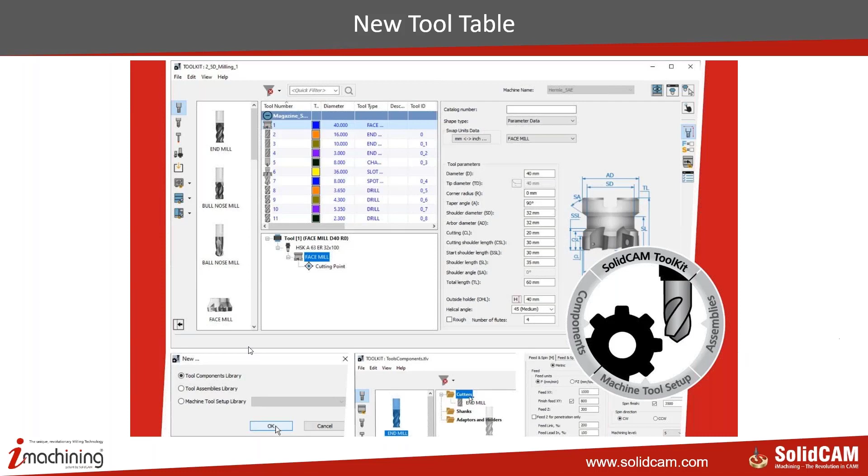For example, the classic tool table that we had in 2020 used to look something like this. And now we have the new tool table, which is a unified tool library system that facilitates better tool management, and it provides major enhancements in the tool definition functionality.

You can manage the tool items available for use for specific CAM parts and in accordance with the CNC machine chosen. So now what you can do basically is create a tool table or tool library specific to a CNC machine. And when you call that CNC machine into your part definition, the tool library also gets loaded along with it.

This is so important for Swiss-type customers who have their tools set according to tool numbers, and that doesn't change. Generally, once they set the tools, they don't change. So they would like to have the same tool type in the same tool number. So you can actually set the entire tool library specific to the CNC machine, and whenever you call the CNC machine, you also get those tools along with the tool numbers that were set while you were defining them.

So what I'm going to do now is quickly run into the software because it's a pretty interesting thing that we have in the new tool table.

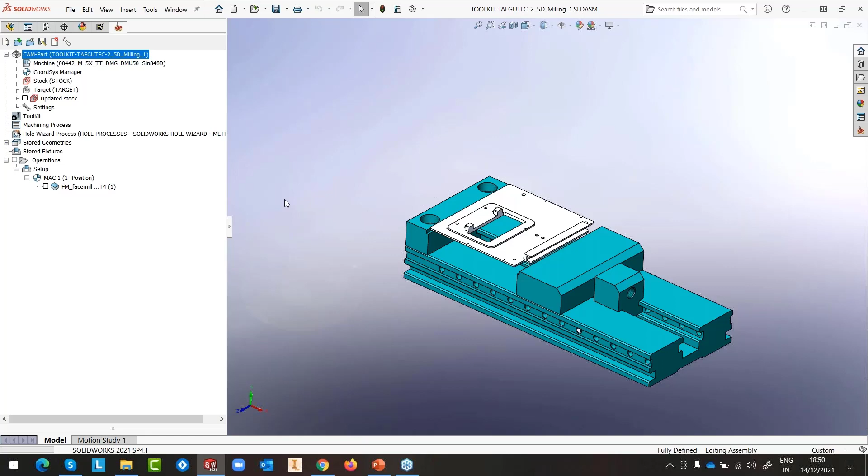So instead of tool table or tool library, we have something called toolkit. We've called this toolkit because it provides a kit to create assemblies of your tools and holders and multi-components. Basically, you can assemble the entire right angle head as a tool and call that tool in your library. So that's the reason why we have called it toolkit. So this is how my new tool table looks.

So if I want to add a new tool, for example an end mill, I can just double click the end mill here, or I can just drag it and drop it in my library here. And this is how my tool comes up. So I have got the tool component here, where I have got the topology. So I enter the dimensions that are needed.

10 diameter, cutting length, let's say it's 25, shoulder is 35, total length is 80, out of holder is 40, number of flutes 4. Now I can add on top of this, depending on what machine I'm using. For example, let's say I'm using a DMG 65 monoblock.

In such cases, I can go into the adapter or the holder and call for an HSK63 adapter. So I can just take the HSK63 and drop it into the holder area. So you can see that now we have an HSK63 holder, and I can put on the side how the tool is looking. I can get a preview straight away.

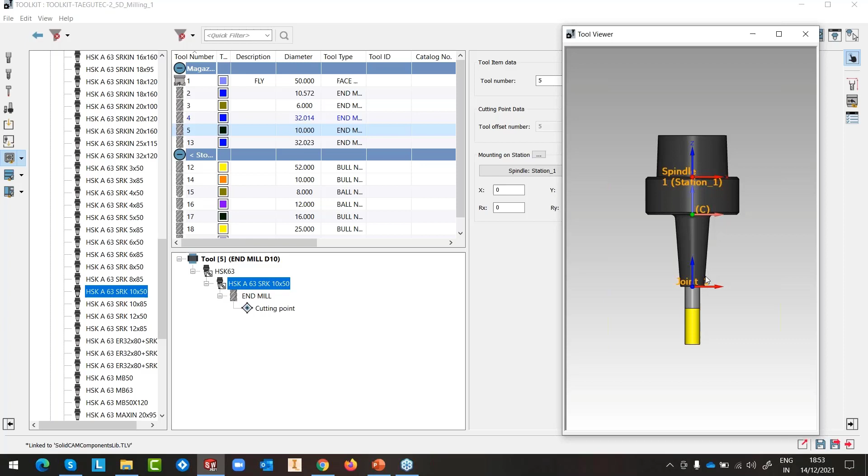So in a similar way, I can define any type of tool, whether it's a bull nose, ball nose, or a flat end mill, or a face mill cutter, or even in turning, I can define whether it's external turning, internal turning, grooving, threading. So you can define all these cutters as they are as an assembly. So each of them have got their joints.

So we have got a joint coordinate system. You can see that my end mill is connected to the adapter here. The adapter is connected to the holder here. And this is my spindle coordinate system. So this is where my spindle is going to rest. So this is how we create assemblies inside SolidCAM's toolkit.

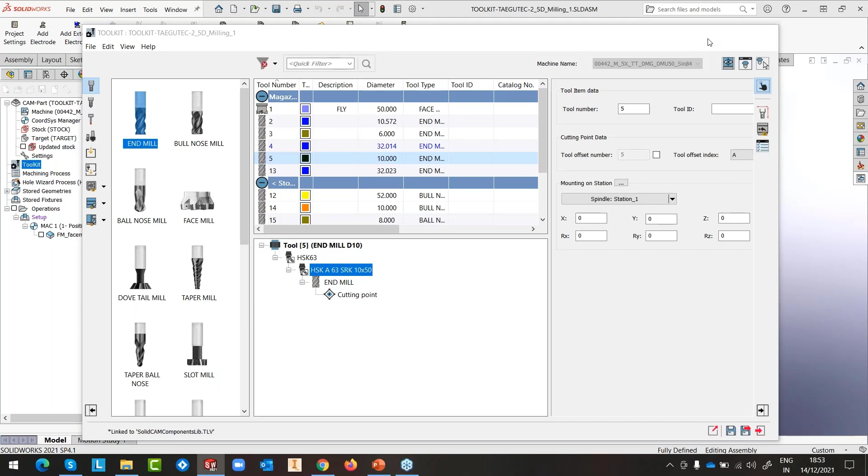Now let's do a very interesting operation. Let's say I have got my tool and I work with ISCAR. So what I will do is I'll open my browser and I open the ISCAR catalog library, what they call a catalog library. And I would like to get from ISCAR a face milling tool. So I'll click on milling.

And when I click on milling, I get the features or type of operations that you can perform with their tools. So I would like to do the facing operation. And then once I click on facing, ISCAR tells me which are all the possible options that you can use for working with their cutters. So I'm going to pick this cutter, HM90.

And with an HM90, it gives me three options here. So depending on which diameter I would like to use, I can select the option. I would like to use a 32 diameter face mill. So I'm going to select the 32 diameter face mill. So I'm now in my tool, and you can see that here, ISCAR gives me a possibility to have a detailed view of the tool. So I have got the tool, but without the insert.

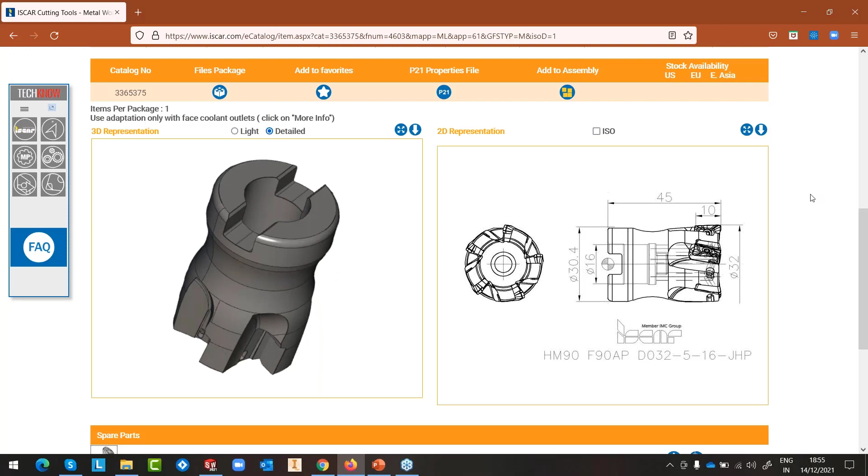So if this is my final tool that I'm going to use, I'll click on Add to Assembly. Perfect. So when I click on Add to Assembly, you can see that it has got the tool. Now there are two items that are still missing. Now this is very smart. So I'll click on Add Holder because the holder is still missing. And again, it shows me only those holders that are suitable for this particular tool. So I will use the BT type holder here.

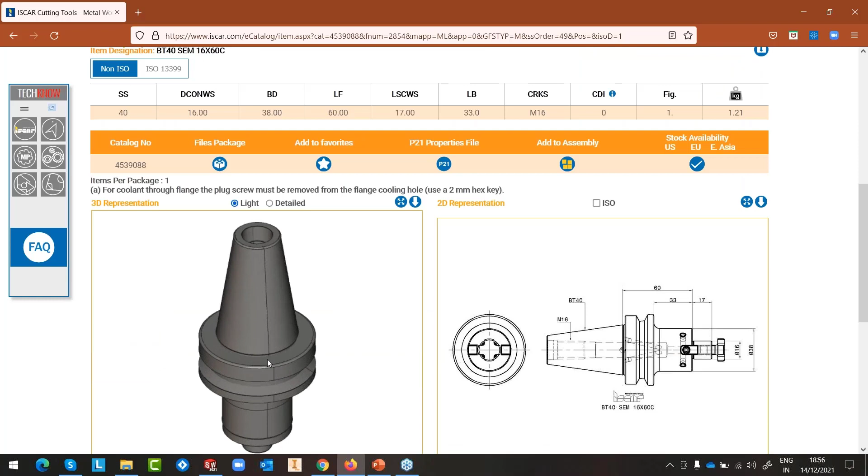So I'm going to select the first one, BT 40 SEM 16 by 60. And I'll add this to the assembly. This is the holder that I'm going to look for. I'm going to the detailed view. Detailed view sometimes can take some time to load up, because if it has more features, it'll take some time to show up on the screen. So I'll add this to the assembly. My assembly is now updated. I'm getting the holder as well as the tool body.

What remains now is the insert. So I'll click on the insert. And again, ISCAR shows me all the possible inserts for the tool body that I've just selected. So I'm going to use, let's say, APKT 1003 PDR-HM. This is the general purpose insert. So I'm going to select this insert. And there's only one possibility.

Of course, there are grades here. Basically, if I click on the grades, I'll only get the VC and the cutting speed. Otherwise, the geometry, I just click on this. So I've got several of them. I'm just going to pick the first one, and I'll add this to the assembly.

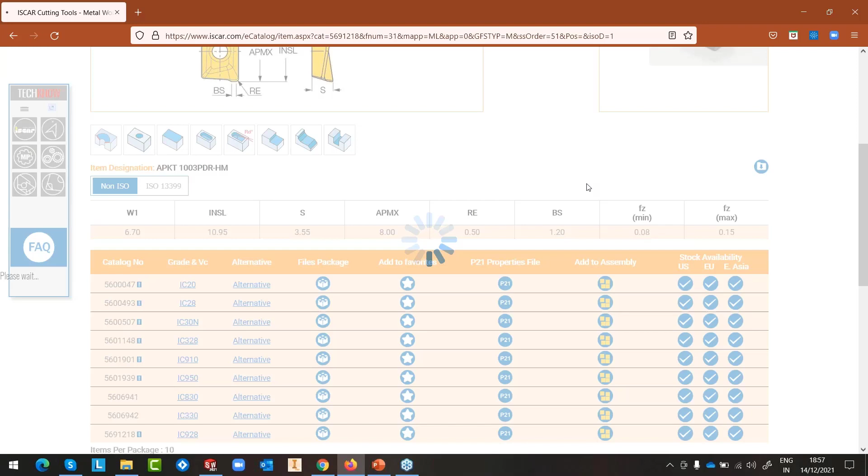Right, so my assembly is done. Of course, like I said, for the detailed image to appear, it will take some time because it needs to load everything. I'm not going to wait for it. I'm simply going to click this button and download the assembly, which is basically going to give me the... depending on the speed, depending on the components that are there in the part. So again, here I'm going to save it.

So like I said, it takes some time for it to show the detailed view. So I've done that. I'm going to open the part, cut this part, and go here, go into the ISCAR tools, and I'm going to make a new folder here. I'll say new webinar. Okay, and here I'll make another subfolder. I'll say milling, and I'll just paste this here and just rename this fellow. Say face mill 32 diameter.

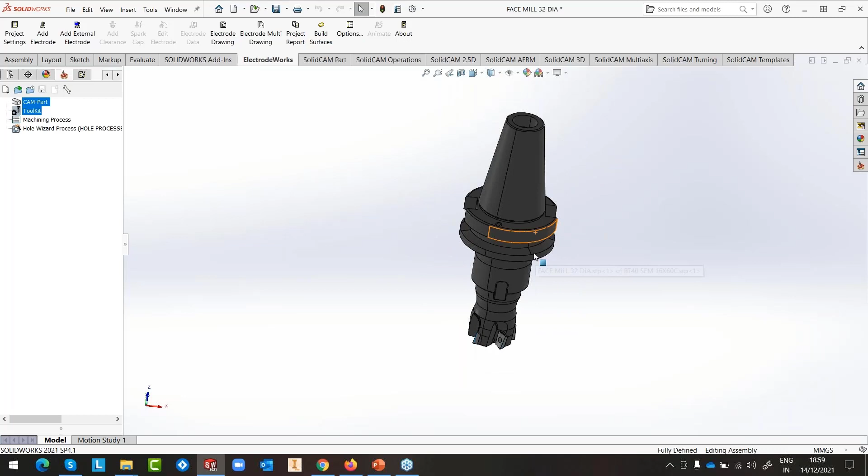So it's a step file that I've got. It's more than enough. I'll just close this for a moment, and I'll import the step file that I just got from ISCAR. Remember that these steps are common. It doesn't matter which particular tool manufacturer you're using. Once you get this particular file, all the rest of the steps are common to us.

So I'm going to start again, or rather open the CAM part. I'll open the toolkit. Okay. So I'll add an endmill here and minimize the toolkit. Go to my window and I'll open my face mill, or the face mill tool basically, and I'll click here on import tool assembly from CAD. Now, before I do that, I have to do a couple of steps, okay? And this step basically is needed because of orientation difference.

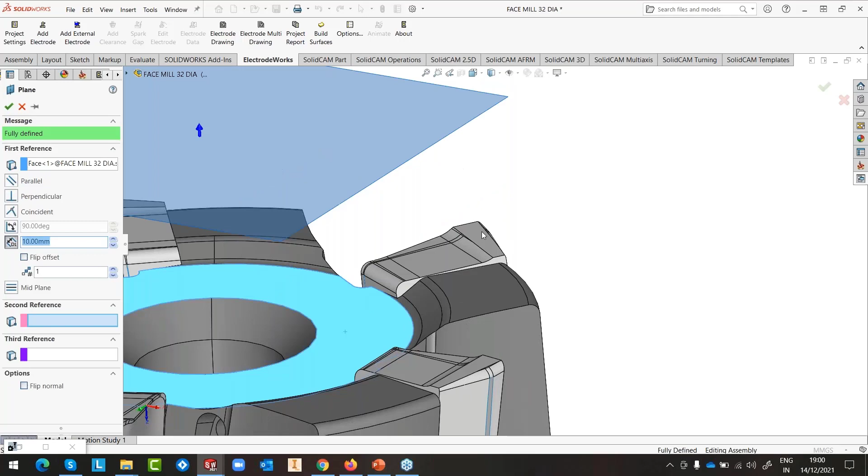So what I'm going to do here is let's create a plane at this point, somewhere here. Oh, sorry, not the edge. Okay, so I'll just create a sketch here. This is just for me to create a coordinate system. Oh, this is horizontal. Oh, vertical, sorry. Okay, another line on this side just for me to put the y-axis. Okay, this is done. So I'll create a reference geometry.

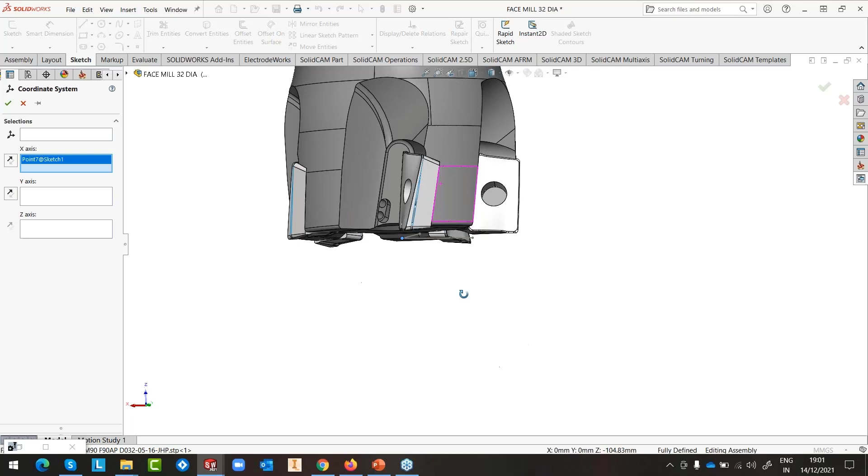I'll say this is my coordinate system. Delete. This is my origin. Sorry. Okay, and this is my x-axis. And this is my y. Okay, so z-axis is in that way. I'll accept this. I'll save this file. Let's not put it here. I would like to put it back into the ISCAR tools, new webinar, milling. Save it. Okay, so this is done.

I'm now going to open my toolkit, and I'll click on import tool assembly from CAD. I'll say okay, because this is my active window. So it's now asking me, what do you want this tool to be? There's a question that the UCS should be in the model. Actually, Doran, I checked it before. The UCS is in a different plane, so I don't get it exactly the way I want it. So I have to create a new UCS. So I'm going to generate this as a milling tool. So there you have it. It creates this tool inside SolidCAM as a milling tool.

However, you can see that I have a problem with my UCS, so I'm going to mount this UCS to the coordinate system number 1. Okay, I'll say okay. So I have the model, I have the tool here back in my toolkit. Just take, drag, and drop it here. This particular small change in our diameter, instead of 32, it's showing 32.014. It's basically because of the STL tolerances. This you can easily change here to 32. And if I click on the preview of the tool, this is how my tool is going to look. Fine. So my tool is done.

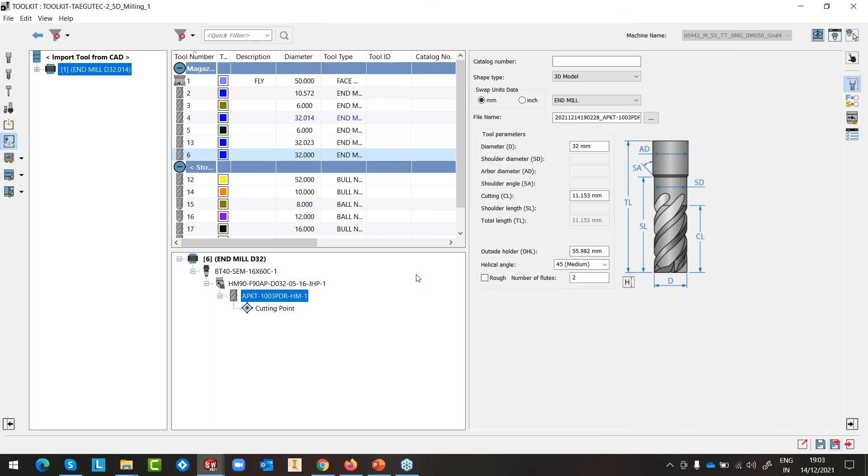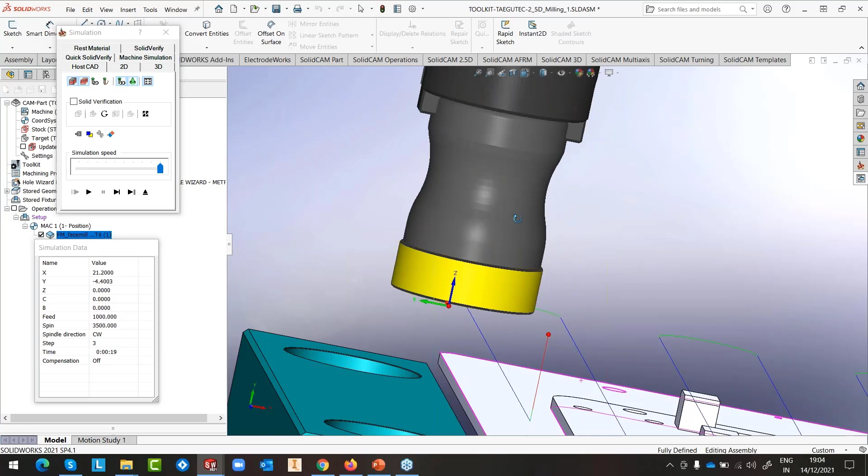This is tool number 6. Save and exit. And I'll go again to my machining file. I'll edit this toolpath, and I'll pick tool number 6 that I just created. Now if I click show, it shows me the tool. Accept this tool and hit the calculate button. I've got the tool and the toolpath. If I run the solid verification here, you can see what it has done now. It has revolved the tool to show you how it would look when it is running on a milling machine. But the shape, everything is the same.

So we take the tool, we take the profile and revolve it, and it shows exactly how the machining will happen with that particular tool. Very, very important, because sometimes when you do a definition of the tool using simple parameters, you could end up missing certain features on the tool, which when revolved could generate collisions with your part.

In such cases, you should have the tool exactly the way the manufacturer has manufactured the tool, and use this for simulation. So I can take it also into SolidVerify and run the simulation. So this is something very, very unique with our toolkit now. You can actually define the tool as it is, as the manufacturer intended, and generate the toolpath.

This is the same if I even take it into machine simulation. It'll show you the same tool, but again in the revolved condition on the machine, and you can run the simulation on the machine with this tool.

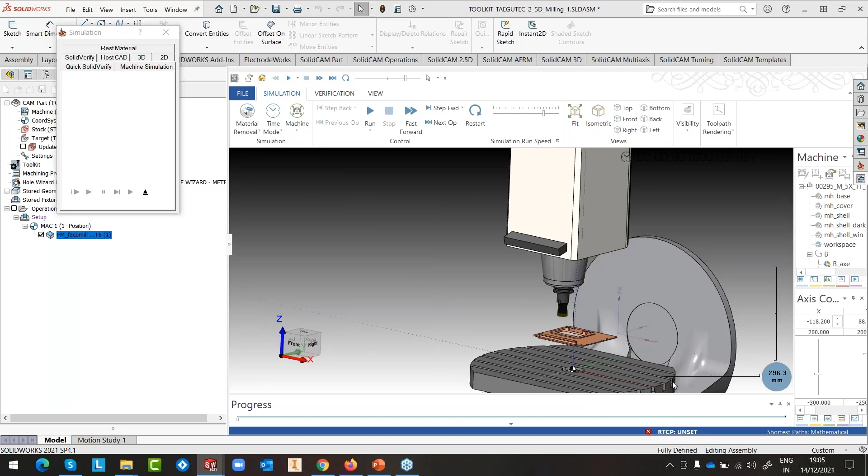Perfect. Now, you would ask me, how would this run with a turning tool with the same tool table? So I'm going to open another file. We'll open a turning file, and I'm going to repeat the step again with the turning tool. I'll open the drag and drop file, and I will also show you the drag and drop on this.

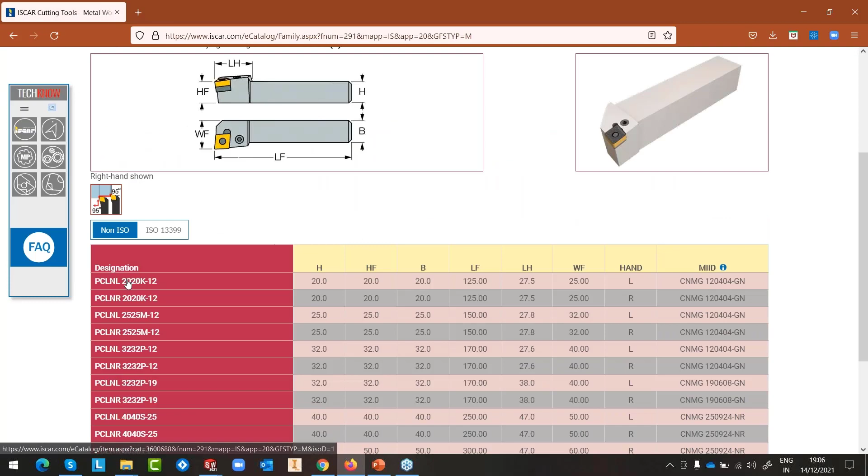Okay. So again, we are here in the toolkit. I'm going to open the toolkit and keep it open while I go back to my home page, and I'll go into the ISO turning. I'm going to use maybe this one. Again, I'll use the PCLNL. In this case, we don't have to do a lot of work, so I'll use the first one.

I'll click add to assembly. Now I'll get a message saying that I already have an assembly. Because I've not registered, I can create only one assembly at a time. But if you're registered, you've created an account, you can create multiple assemblies. So I'm going to delete my earlier milling assembly and start off with my new turning assembly.

So first thing I'm going to add is my holder to the tool. I'll use the first one out here, pick this and add it to the assembly. And then the insert. I'm going to use, let's say, the CNMG insert. I'm going to pick the first one, and I will add that to the assembly.

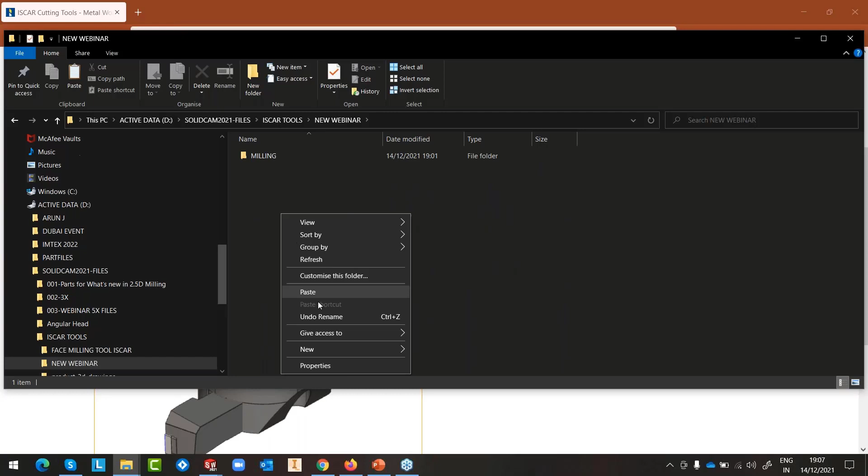Okay, and immediately, let's download the assembly. Save the file. Let's go back to my downloads, cut this file, go into my tools, webinar. I'll make a new one here, call this turning. Paste it. I'll say this is a turning tool.

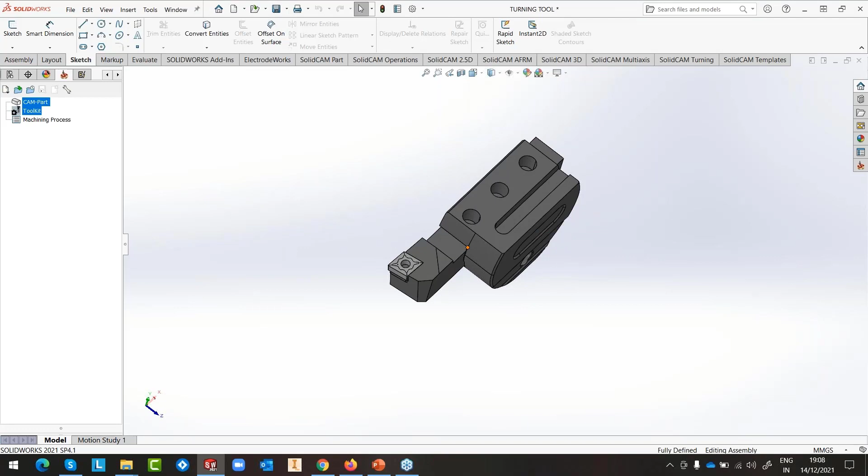Okay. So let me open SolidWorks again. Let's close this for a moment, close this also, and then take the turning tool. So I have the tool here now with the holder and the insert as an assembly. Let me save this. I don't need to do anything here because the coordinate system is perfectly aligned.

So I'll again open in SolidCAM my turning part. Go to the toolkit and drop a profile insert here, minimize, go back to my assembly, maximize and import assembly from the CAD. Say OK. Here, instead of milling, I'm going to generate this as a turning tool.

Right, so we have the turning tool, everything out here. Say OK. I'll just drag it and drop it into this. Tool number 10 is what I'm going to use. So I'm going to edit this toolpath. Let's go to the tool and I'm going to select tool number 10 that we just created.

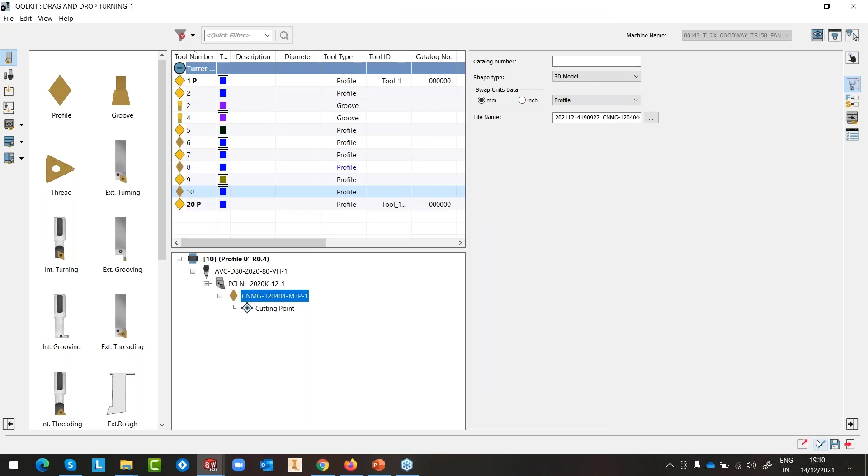So this is the tool. Done. Maybe change some things in the technology. I'll say 0.4 as my step over and calculate, run the simulation. If I go into SolidVerify and start the simulation, you can see everything coming up: the insert, the holder, as well as the tool holder. All of them have been brought in.

Not only have they been brought into SolidCAM, you can also use them for simulation. So it's a very, very powerful tool table. You can now imagine the possibilities are almost endless. You don't have to really spend your time defining the tools.

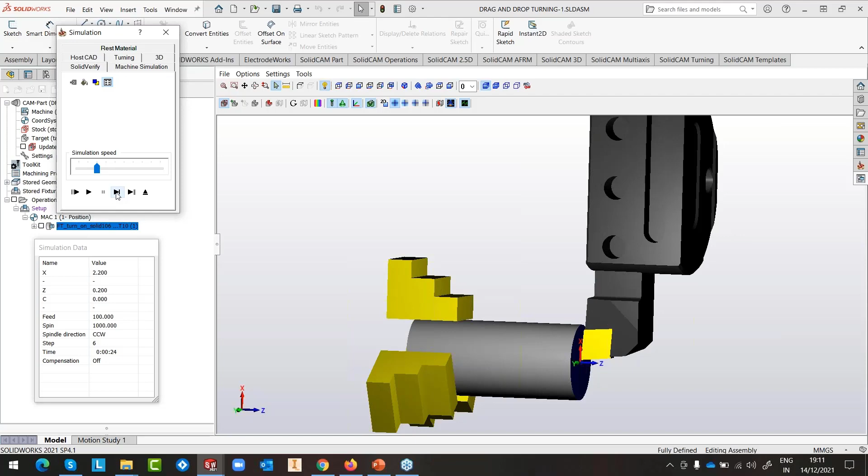If you are already using tools from a standard manufacturer, and they're ready to supply you the CAD files, you can just import them and start defining the tools exactly as they are into your files. So this is one of the biggest advantages that we have with our tool table.

Another very important aspect here with the tool table, like I told you, is that we can define right angle heads as an assembly component, and we can program paths using those assemblies. So I'm going to open another part. Let's go to the plain white background. So I have got a part here.

If I go into my toolkit and go into the definition or the view, you can see that I could take this CAD data from the manufacturer of the right angle head, use the CAD data as it is, and mount my tool with a joint on this particular area here. Again, this is all simple mathematics. You just need to specify your joint location point.

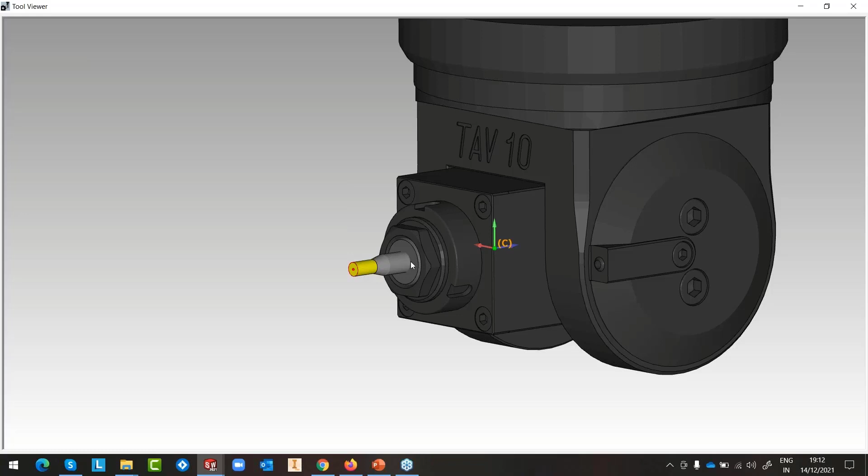You can also specify, because this particular head has an axis that can rotate from 0 to 90 degrees, so you can do any angle in that, what angle this subhead is going to be mounted at. Currently, it's mounted at 90. You can mount it at 45, at 0, at any angle as specified by the manufacturer. So if I now run the simulation, let's go into the machine simulation.

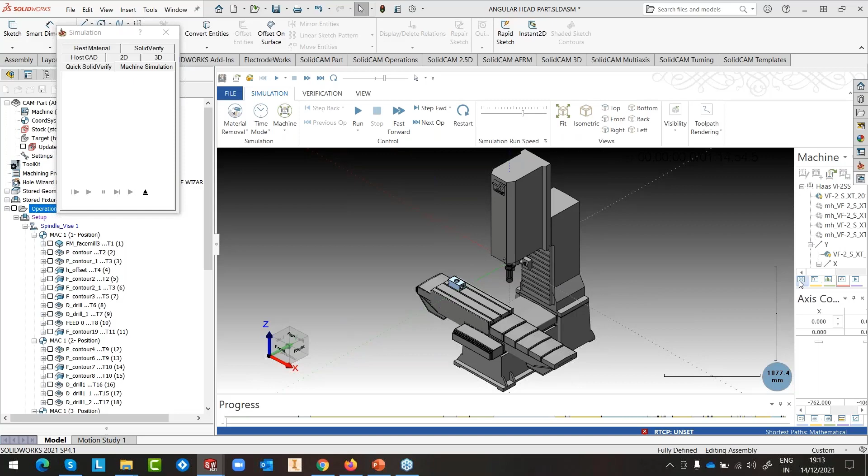So I've taken this on a Haas. That's the first setup. Let's go straight ahead. Now, because we are doing the tool optimization and using channel synchronization, the tool change time is bare minimum. You can have two paths mounted, and with the channel synchronization, you can minimize the tool change time itself.

I would like to go straight to the point where the right angle head is mounted. Here it is. You can see that now the right angle head is mounted, and I can simulate this part using the right angle head from the CAD data that came to me from the manufacturer. And it's pretty simple to assign the right angle head onto the machine, exactly the way we did, but slightly more steps than just pulling the data from a step file into our toolkit.

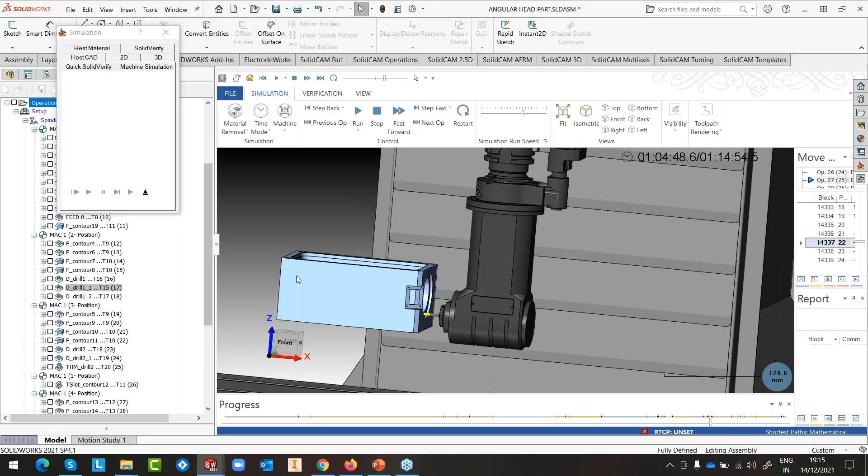So every component of this particular head is actually checked for collision. If we go in, hopefully there should be some collision, because this coolant pipe runs into collisions, but we don't see them here. But every single collision, including if a metallic coolant pipe is touching the part, you will get a warning of the particular operation that is colliding.

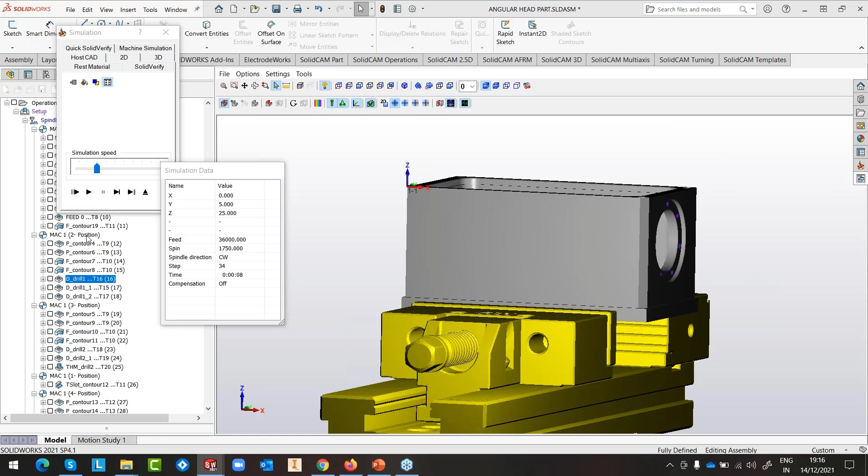So to show you even more in depth, I'm going to run this simulation here, the SolidVerify, and run it very slowly. Next one. Definitely we're going to have one collision somewhere. Not on this side, maybe the other side. So whatever collision we have with the head, including the pipes, is immediately identified by SolidCAM.

So what you have seen today is a very powerful toolkit. You can import tools, whether turning or milling tools, from different manufacturers as a step file or a parasolid file, take those components inside SolidCAM, create a tool out of it, and use the tool as it is in programming your part. Very powerful feature. The second feature we saw was to take a right angle head and create programs using it on a 3-axis machine. So the output will also be according to the right angle head.

So let's move ahead, and since we are in one of these parts, I would like to show you the drag and drop feature, which was earlier implemented with milling. It's now been implemented also in turning. So I can use drag and drop to do turning straight away. I have facing done here, and I have a template stored for my turning. I can take this template and drop it on the first and last face, and the toolpath will be automatically generated for turning.

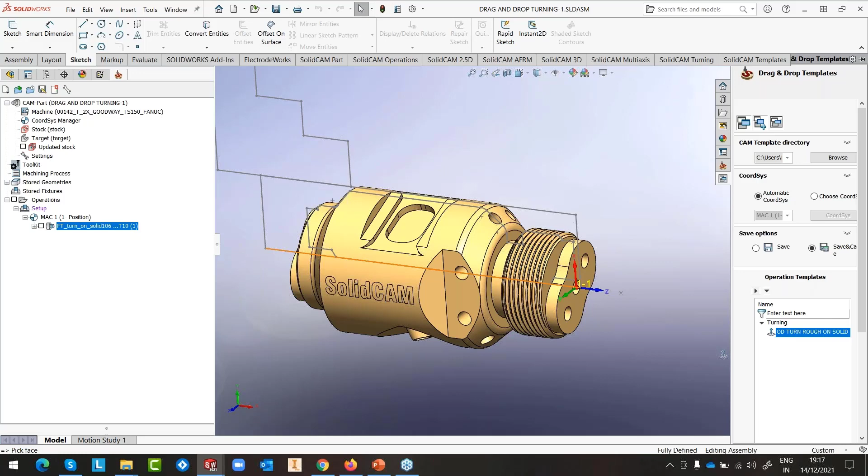So I'll click on my template, drag, press Control, pick the first face and the last face, leave the Control button, it'll ask for the coordinate system, I'll accept it, and my turning program is already created. So if I run this simulation now, even in turning mode, we are going to have a collision here, and this collision can be easily caught in SolidVerify. So you can see that we did have the collision here.

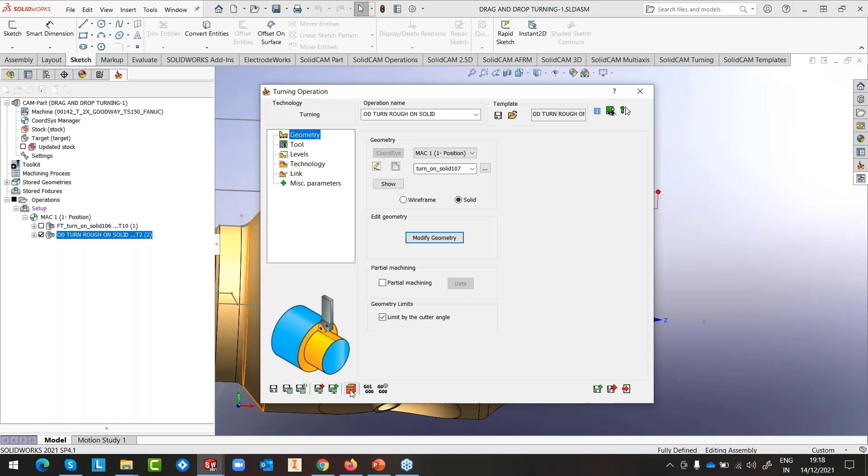Now, in order to avoid this collision, I can simply go into the toolpath. I can go into the Modify Geometry, and at the end extension, I'm just going to reduce it by -2 millimeters. So I'm going to stop it much before the chuck is there. Let's calculate, run the simulation, and we should be done.

So no more collisions. So the drag and drop now works like a charm even on turning. So you can do turning, internal turning, grooving, all those things. Just drag the template and drop it on the geometry, and the toolpath is generated automatically. Fair enough. Let's move ahead.

I'm not going to open the presentation, but I would like to go ahead with some of the features that we introduced with SolidCAM. And let's open another part of the angular head. Okay, a very important feature that we introduced in 2021 was the roll-in approach for facing. Why is a roll-in approach needed?

This is needed to avoid chip thinning that happens when you're using a straight approach or even an arc-based approach from the other side. In fact, Sandvik has got a very nice video on their website. If you just Google roll-in approach on Sandvik, you can see that video, and they'll precisely show you what happens when you don't use roll-in and what happens when you use roll-in. You can see how the chip thinning happens when you don't use the roll-in approach, and it does not happen when you use the roll-in approach.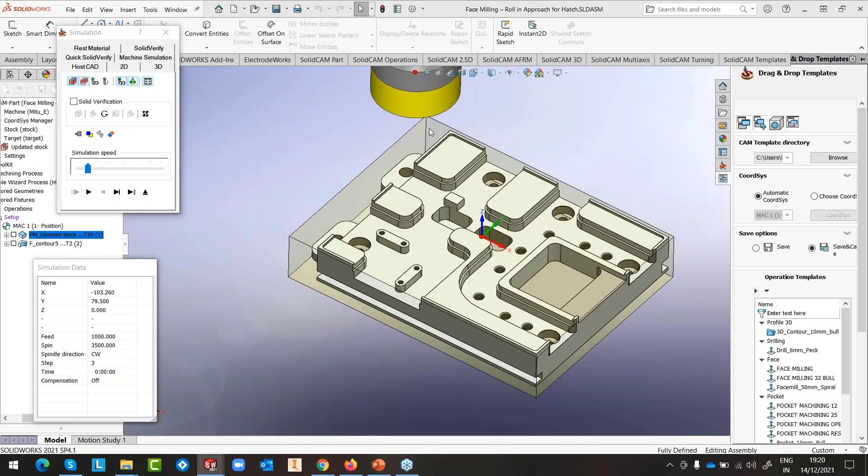So if I look at the face milling, what we have in the technology is that we have got a roll-in approach that's been provided now in the 2021 version. So it's automatic. Just click on the roll-in version, hit the calculate button, and we have the toolpath. And if we run the simulation, we can see what happens here. The tool is entering, but not straight. It has got a roll-in approach.

Okay, so it's taking a nice roll-in approach into the part, avoiding the chip thinning, and it's one way. So every pass that enters the material takes the roll-in approach. So this is a very, very important feature as far as the face milling operations are concerned. Again, this is done to enhance your tool life. Right, let's move on. Let's open another part.

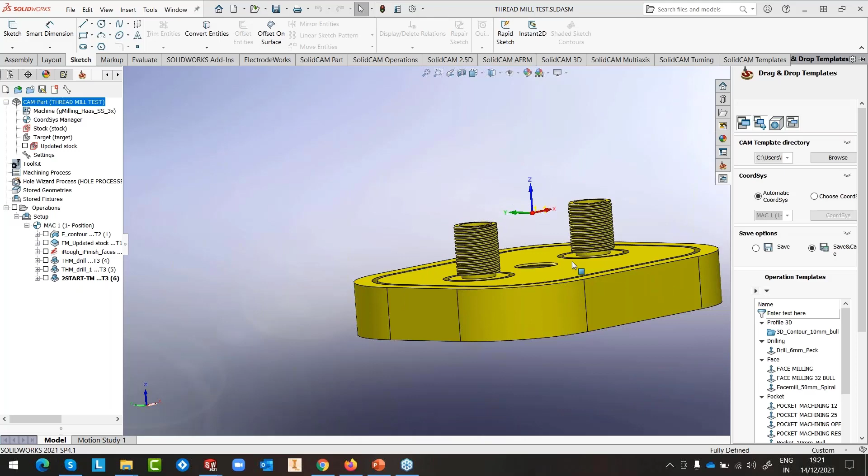Let's go to the thread milling. In thread milling in 2021, we also introduced the fact that you can now give a multi-start thread. So if I go into the operation, which was earlier simple thread milling, now if I go into the technology and into the advanced, we can now define the number of starts that are there in this thread. Okay, so just defining the number of starts, calculate the part, and if I run the simulation, we can see that it does.

That's the first, the second start, again the first start, the second start, the first start, and so on. So it keeps doing both the starts. Start one first, then the next start, one more depth of cut with start one, then start two, again start one and start two as it goes, creating the depths into the part. So another very nice functionality that we introduced with our thread milling, we can now have multi-start threads, more than one. Pretty nice and very important. Okay,

let's open another file to see what are the other enhancements that we have done with 2021. Go to 3-axis. Now, as a part of a 3-axis strategy, although we cannot really classically call it 3-axis, we have released a feature called automatic 3+2. Automatic 3+2 is a very unique functionality with SolidCAM, which helps you to generate toolpaths from different directions without the need for the user to define boundaries or from which side it has to come.

Although in our Auto 3+2, we have got three different ways of defining the approaches: automatic, semi-automatic, and manual. In automatic, SolidCAM automatically finds out the best possible approach for machining any given part. The user does not define anything. In semi-automatic, SolidCAM expects the first major direction to be defined by the user, which normally happens to be the Z direction. Once that is done, SolidCAM then automatically finds the other possible directions of machining the part by itself. No need for any user intervention.

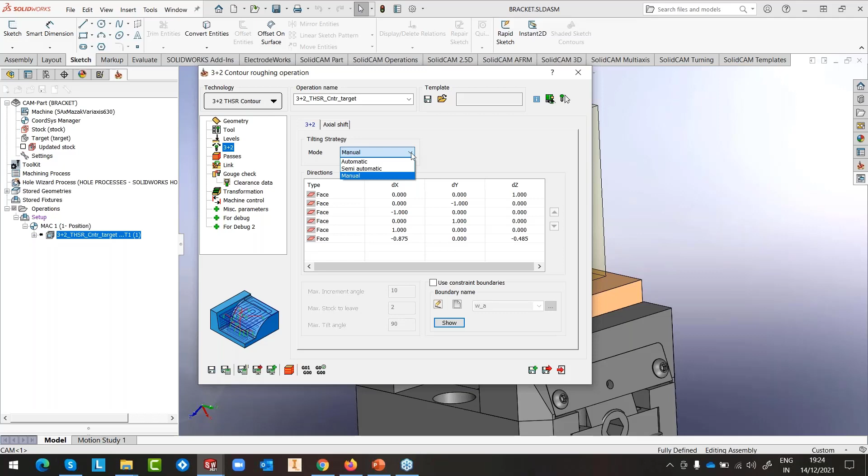And the third one, the approach that I've used for this particular part, because it's more or less a prismatic part and I know the directions, is where the user defines different directions from where the tool can approach the part. By doing this, you reduce the time for SolidCAM to find the directions, but it completely eliminates the user input for A, the geometry, B, the boundary, and C, the amount of stock that needs to be removed. All these things are automatically found out by SolidCAM.

So this is what I'm going to do. I'm going to use a diameter 12 bullnose. I'll save this and I will calculate this toolpath. Of course, this is going to take about a minute and 15 seconds. You ask me, why did you do this manual and why not automatic? Like I said, this is prismatic. So the directions are very well known here, so I can define them.

But then the question comes immediately: automatic. Where do you use automatic? Once this part is calculated, I would like to show you a very complex part. And that is where automatic comes into play, because in that particular part, I wouldn't use the word impossible, that's a bit harsh, but it is going to be extremely difficult for the user to decide which directions he needs to machine that part from.

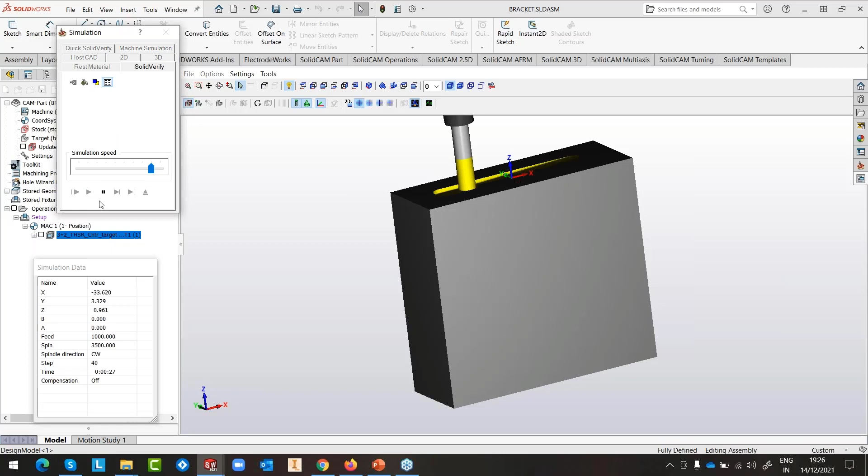Now if I run the simulation of this part, let's run it quickly. So this is the main direction. And once this direction is done, it automatically flips to the next direction that I've defined. It finds the exact material, and I don't need to define any boundaries for this. It finds the exact material and the area to cut. Again, from this direction, the other direction, there's a collision with the arbor. Okay, I'll just say stop for this operation.

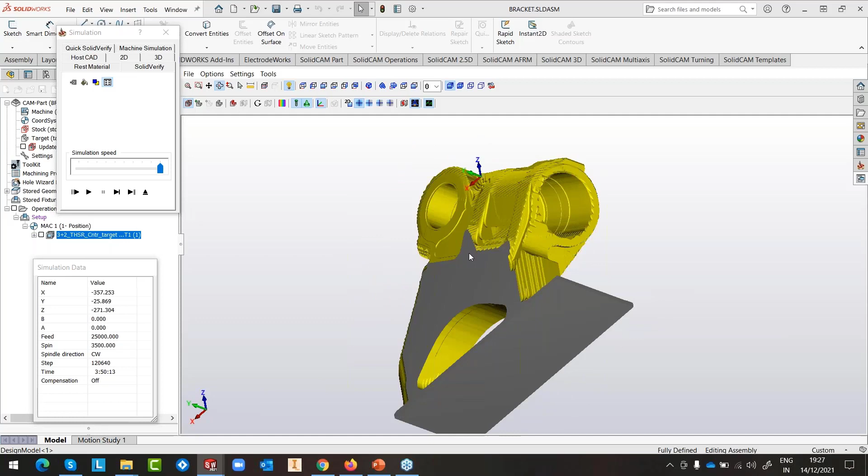And it machines also from the direction that I've specified, and that's it. I did not specify anything other than the directions that it needs to cut, because I used the manual method. Now you'll ask me, where do you use the normal method or the automatic method? So let me open a part. This is going to be just a quarter of the part. This part is called a Pelton wheel, the most difficult part one can get to machine.

So if I give this to a user and say, please, can you rough this out? Probably he'll get the first direction right, because it's going to be from the Z direction. What after that? He'll say, okay, I'd like to go in this direction. Once these two directions are done, the user is clueless. Unless he keeps looking at the simulation and comparing the target, he will not know how and where this part needs to be cut from. Cut to SolidCAM Auto 3+2. I can just define this entire thing as one part and ask it to automatically create the toolpath.

So what you get here is basically this. So I have my stock here. I've just taken a quarter piece of the Pelton wheel, one segment of it, and we run. You can see automatically it decided that this is the best possible first approach. It was completely automatic. No manual directions have been set here.

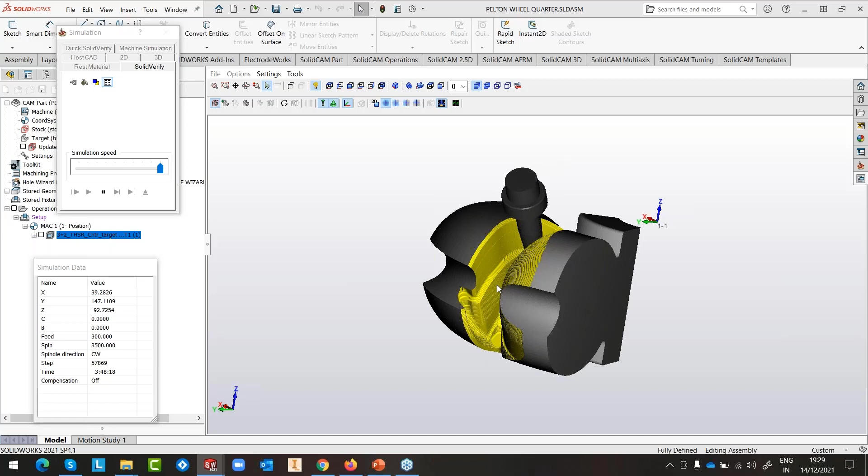It completes this machining, finds out how much material is remaining, and based on the material remaining and the boundary that it automatically generates, it creates the area for machining. There, it automatically changed the direction. And I can also specify with Auto 3+2 the maximum limit my machine can tilt to. So I can say just go between 0 and 90, and it will only find the areas that are possible to be machined between 0 and 90. Anything more than that, it will just leave the material. Okay.

So again, a very complex part done automatically by Auto 3+2. Right. Further enhancements with 2021. Let's look at more enhancements in the area of milling itself. So one of the most crucial aspects that we did in 2021 was introduction of a new finishing operation called as geodesic.

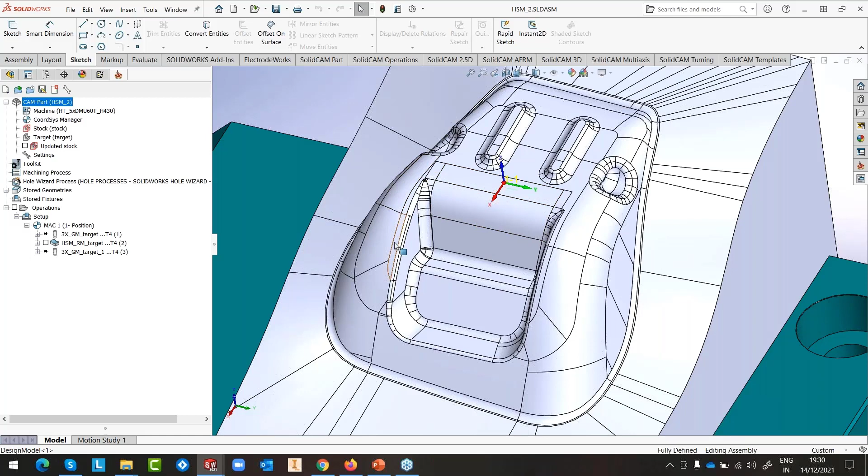Geodesic works unlike any other CAM system that you would have seen. Basically with geodesic, the spacing between the two toolpaths is always kept consistent, irrespective of whether it's a vertical wall, horizontal wall, or an intermediate wall, or any other feature. So let's say I have to machine an area between this particular curve, the pink curve that you're seeing. I want the tool to follow the area between this pink curve and machine everything in between, giving constant step over. Remember that there is a vertical wall here, almost a vertical wall. Of course, there's a small draft, but I would like to run my toolpaths on that.

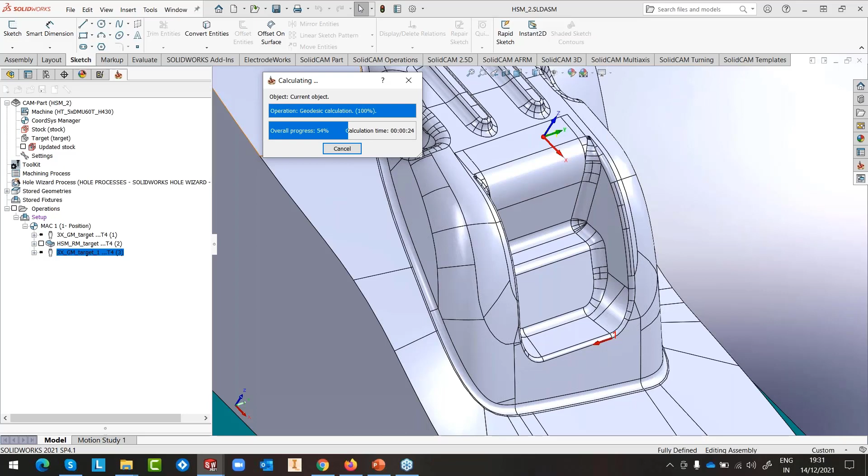So let me calculate this toolpath. It's called as geodesic. What does basically geodesic mean? The dictionary meaning of geodesic is you have got a tub of water, you take a wire of a particular shape, drop it from top. The ripples that are created are mathematically called geodesic ripples. So the distance between those ripples is always constant. And that's the same principle we are using here in geodesic machining.

So you can look at this simple 3-axis, look at the wall, look at the fillet. Anywhere and everywhere, the step over is absolutely constant. It doesn't matter whether you're looking in this way or whether you're looking from top. The step over is consistent and it's equal. I've defined the step over of 0.3 here, and it's consistently 0.3 right from the start it approaches until the time it ends. So geodesic is very, very powerful in creating absolutely beautiful finishing toolpaths which have got a consistent step over. So if I've set 0.3, it'll be consistently 0.3 everywhere. It doesn't matter what kind of a geometry you're using.

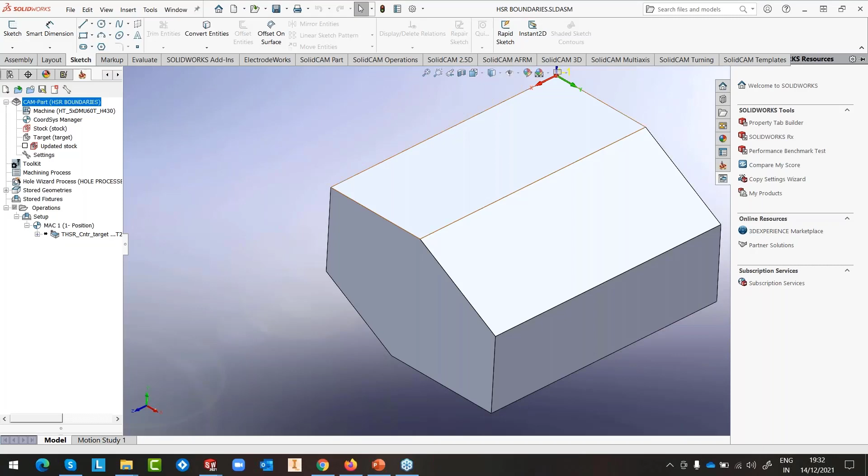Right, let's quickly run over to other enhancements that we have done in 2021. Let's look at the boundaries. So in Turbo HSR, we have now developed a new system of generating boundaries. Now, this could be for any part. So if I go into my boundaries, I typically had the automatic boundaries.

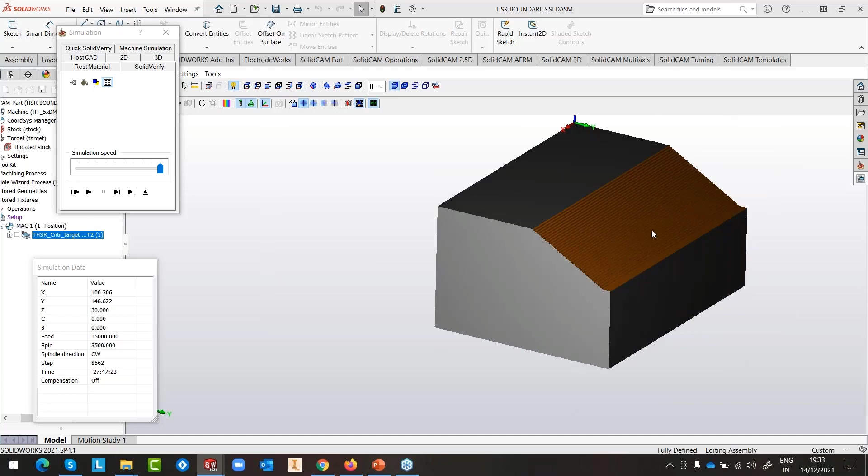And if I use this automatic boundary and calculate the toolpath and simulate this, run the solid verification, you can see what happened here at the end. It doesn't go all the way down. It stops here because I've used the boundary condition as the center of the tool to be on the boundary. So anything below this will violate the boundary condition. So it stops there. In order to overcome this, we have got within our boundary something called created automatically of the part silhouette. So I can create automatic boundaries of the part silhouette, and now we'll just calculate it.

We've got a completely different toolpath now. So let's run the simulation. Okay, let's use a ball nose instead. Yeah, that one. Let's run the calculation and let's run the simulation now. You can see it's gone almost down to the final one.

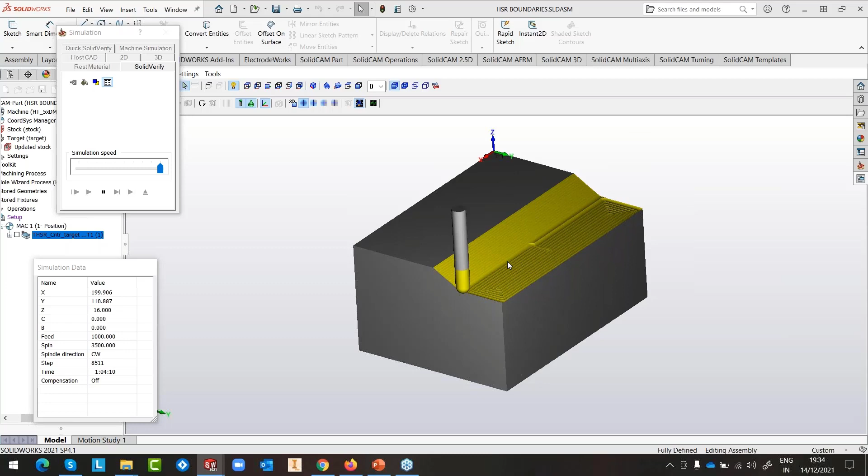Okay. Now, if I use a different condition, instead of part silhouette, I say tool contact. I'm not going to use part silhouette, but I'm going to use tool contact. I'll have a completely different set of toolpaths that will take care of that small region that was left over. So I'll go to solid verify, run the simulation, and you can see that it went all the way down up to here without the need to define any special boundary other than saying that use the tool contact boundary for roughing.

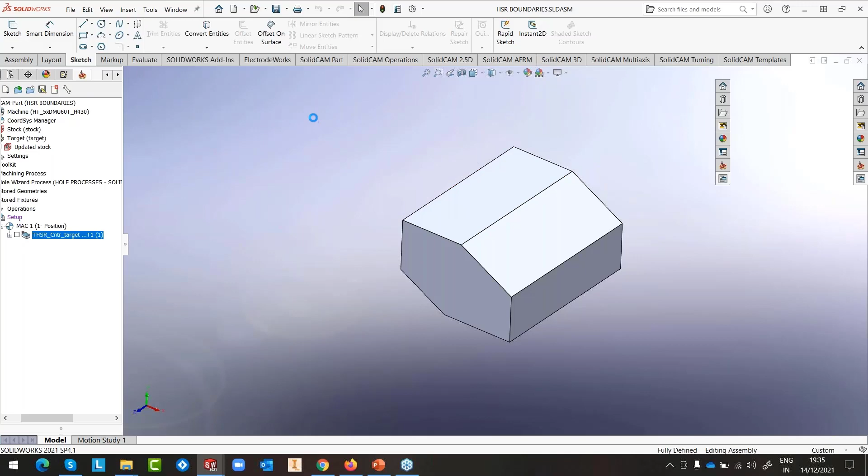We can also say part end height, and we'll give the offset value as 6. If I give the offset value as 6, then it will run around the entire part. Okay, so it's going to run around the entire part if I just provide the offset value out here. So this is something new that we introduced in 2021. All right, let's look at more features that we changed or introduced in 2021, apart from, of course, the general features of tool table that we introduced.

Open another part. With Turbo HSR, of course, we had these options already in HSR, but with Turbo HSR, we developed a new kind of combination toolpaths, and that is called combined constant Z with either linear or constant step over. So we have got a combination toolpath now, so I can define step over and step down and the shallow areas or the slope angle, and calculate the toolpath. What you're seeing probably is a real-time calculation, and the part size is approximately about 180 by 150 by about 55.

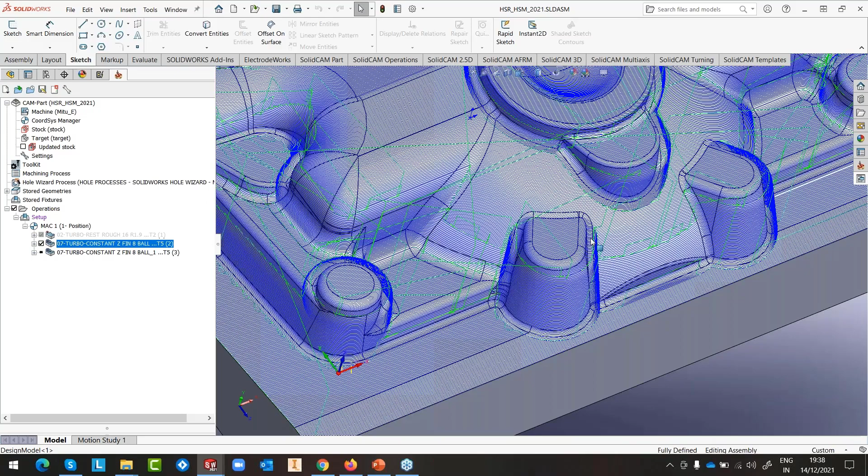With the linear machining, the angle for machining is automatically defined or derived by SolidCAM, and the user need not define these angles. So the angles depend on the geometries that are out here. So they're not the same. It again depends on the kind of geometry that it gets. Based on the geometry, it automatically changes the machining angle.

Right. So this was about constant Z along with the constant step over. Jump to a set of improvements that we did with SolidCAM 2021. Improvements that we did with HSS. So in HSS, earlier, if I had to machine these three faces, I had to create three different toolpaths. With 2021, I can now define multiple curves.

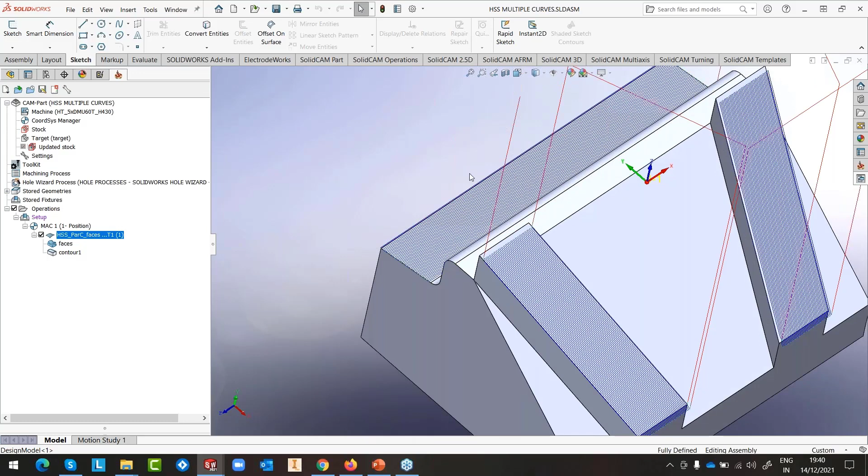So if I click on the curves, I can define one curve here, another curve here, and another curve here. I can have multiple curves, and I can have multiple faces, and it will just create a single toolpath. So it will machine this face parallel to this curve, this face parallel to this curve, and then this face parallel to that curve. So you can now define multiple curves in HSS.

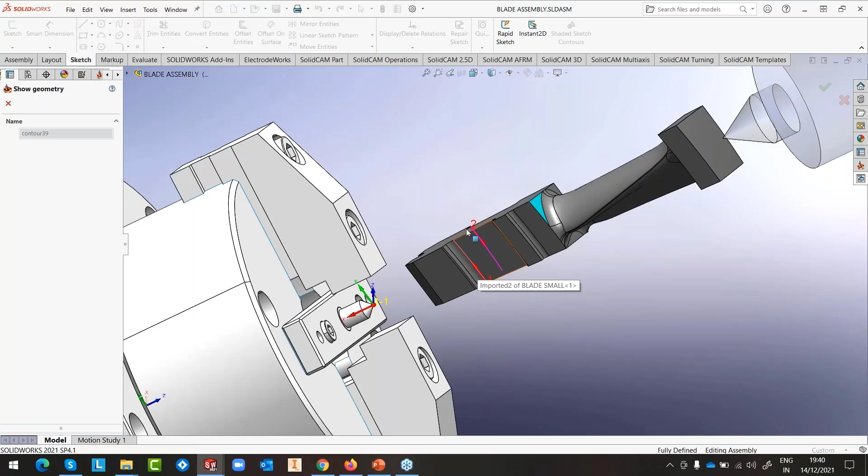Keeping on the same multiple curves area, since features of HSS are also taken into Sim5X, I would like to show you also how we take multiple curves and machine multiple surfaces in 4-axis. For example, I would like to machine this face here and another face down here, and this needs a single toolpath. This can be done where I just define two curves, one curve here and another curve here, and I just select two faces.

And if I calculate this toolpath, you can see that it machines the first one, and then it retracts, travels to the other area, and machines the other face. So multiple faces now can be done in a single toolpath. You don't have to define one toolpath for one face and then make another toolpath for another face. You can have multiple faces as long as you're using the same tool in the same operation.

Coming back again into our enhancements of Sim5-Axis, there are plenty here. Let me first close this file, because every time this opens. Okay, so let me open Sim5X. A big change that we did, something that was asked by several of our users and customers worldwide, was a change in our rotary machining.

So when machining rotary paths in the 2020 version, or even in 2019, the tool center was always in the center of the axis. Now, it's not a great way of cutting, especially if you're using a bullnose tool and you want to cut where the tool axis and the rotary axis are almost aligned. When that happens, the center of the tool actually does not have any RPM, so it's not an efficient way of cutting.

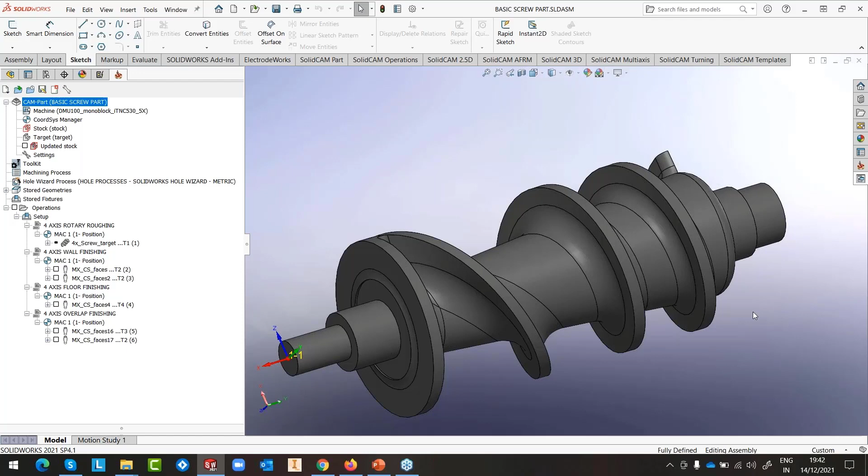If you're using a bullnose tool or flat end mill, instead of keeping the tool right at the center, we would like to offset the tool away from the part. And that particular offset is provided with the new version in 2021, where we call this the side shift. So I can now provide a side shift of a particular value and hit the calculate button. It'll take about 30-40 seconds.

For people who are looking at rotary machining, what rotary machining basically does is it uses a simple 3-axis roughing algorithm, but instead of cutting the part in a planar space, the part is sliced in cylindrical space. And then the toolpath is created on the cylindrical slice that it generates on the part. So it's basically a simple 3-axis feature that's been implemented in cylindrical space.

But the side shift is something that cannot be directly implemented on a cylindrical space. So side shift is a very complex algorithm that takes into account the tool geometry and then shifts the center of the tool away from the rotary center by the specified value, ensuring that the side of the tool always starts cutting the part. So if I run the simulation, let's go into the machine. That's much better visualized on the machine.

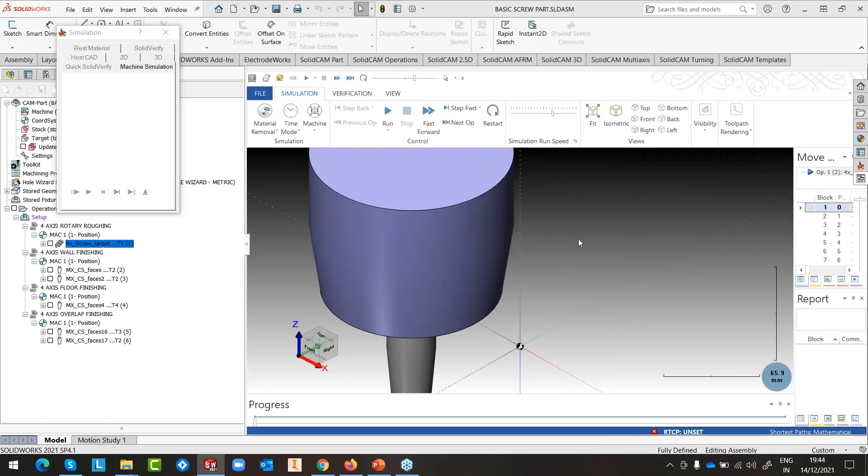So I'm going to go, let's say, to the right view. And you can see that once it starts cutting, okay, you can see when it's cutting, the center of the tool is away and it shifts because it's a bidirectional cutting. It shifts its direction as and how the direction changes. So the center of the tool is now offset from the center of the part. It's never on the center, exactly coinciding with the center.

It looks very simple, but trust me, it's a very, very complex algorithm to shift this in just by defining a value.

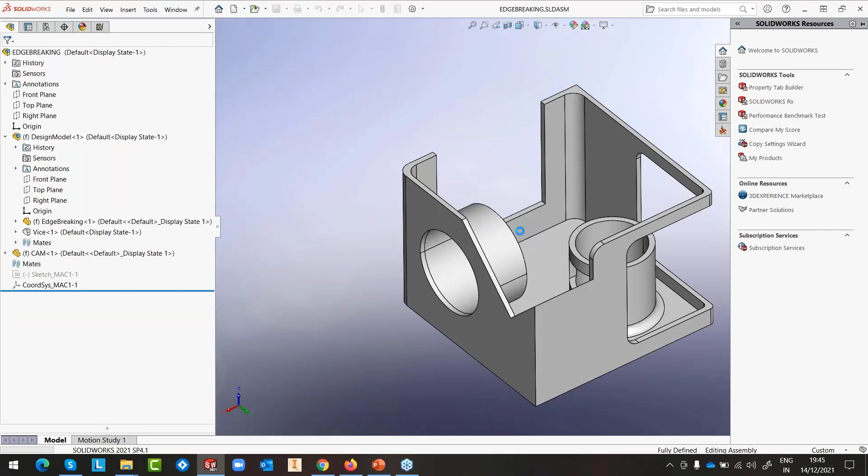Let's open more parts, more features. So we go to something very interesting that we released in 2021. Why I call this very interesting is the fact that I have customers, SolidCAM customers, who employ more than 40 to 50 unskilled laborers to actually do deburring of a part once the machining happens. Now, it's a very risky proposition because let's say you're cutting aluminum and the machined part is offloaded from the machine, sent to this manual labor to do the deburring. It all will depend on the mood of the laborer who is doing the deburring.

Suppose he has a very rough day, the pressure he'll exert on the part is slightly more, you'll probably end up damaging the edge and generating a much bigger chamfer than what was required. So instead of doing an actual deburr, he'll actually provide a chamfer and the part is rejected. Also, you don't really get skilled people, they're very expensive. And most of the times, this deburring is done manually by people outside. So instead of doing that, SolidCAM now introduces an automatic deburring feature for CNC milling machines.

It's not that always the deburring is done by the manual labor, it's also done on CNC. But the programming for deburring will take the same time as programming the part. Okay, that's one of the reasons why programmers hate to do deburring toolpaths on the part and run it on a CNC machine. They let the manual operators do the deburring, or even when the operator has loaded the part and has got nothing to do, he just takes the part and starts deburring the part. Now all those days are gone, and we can now do the deburring automatically in 3-axis, 3+2-axis, 4-axis and 5-axis. In all the 4 types we can do deburring.

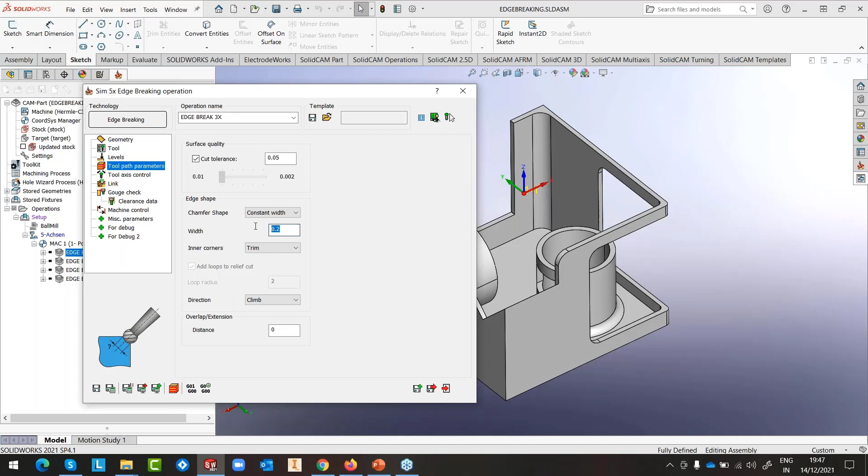All we have to do in deburring here is specify what is my target. So my target is simply the entire part. Okay, and I specify what tool. Currently with 2021, we support ball nose and lollipop cutters. Starting with the 2022 version, we'll also start supporting flat end mills to do the deburring. And that's it. We just have to specify what is going to be the chamfer width that we desire from this particular operation, define what axis it is and simply hit the calculate button.

It's going to take, let's say about 30, 35 seconds. But remember, that if I have to create the deburring toolpath for this manually, that could easily take an hour. Okay, so let's run the simulation. If I go into SolidVerify, I've got this part as coming out from the machining, and we can run the deburring. You can see that the edges are automatically found. The holder geometry is taken into consideration so that there are no collisions, and it nicely does edge breaking of the component. No collisions even in corners where the tool cannot enter.

Okay, so you can see that orange colored mark on the entire part just tells us the fact that this has been deburred. So whatever is possible is deburred. So if I zoom in, you can see that the chamfering has been done very nicely on this part. It took not more than 15-20 seconds to generate this toolpath.

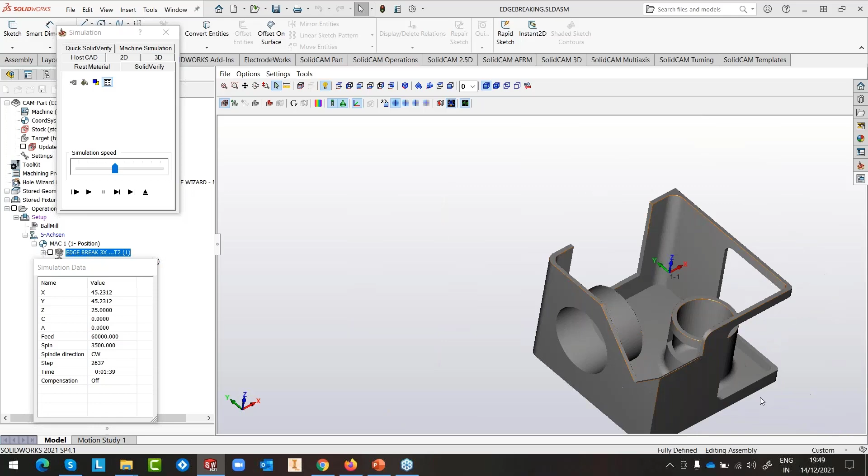Now imagine the same part I would like to do all in 5-axis. So I'm going to suppress this operation, move the 5-axis operation up, edit, and the only thing that I need to change here, in the axis, is I'll just change it to 5-axis, and we calculate the toolpath.

When you're using 5-axis, you can also specify what is going to be your tilt range. That means what is going to be your limit. You can put the limit between 0 and 75 degrees, like I've done here. So the tilting will happen only between this. I don't want it to go completely to 90 degrees. I want it to stay between 0 and 75 degrees. And the deburring will be done by keeping the part between these two angles only.

Like I said, it takes approximately 35-40 seconds. Otherwise, if you would like to deburr this particular part in 5-axis, I'm sure it's going to take 1 to 2 hours straight away. And even then, you're not going to be sure whether it's going to do everything or not. Here, even the collision check is automatically done by SolidCAM. So if I run the simulation,

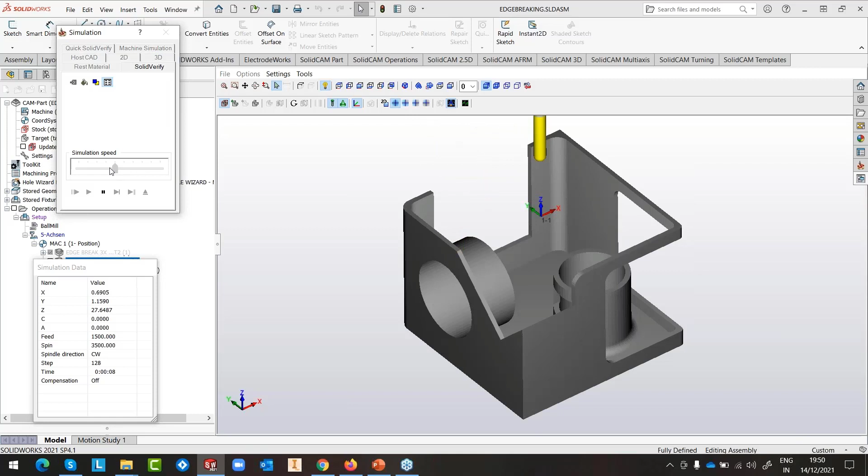whatever is possible, it's doing with 3-axis. What is not possible will then be done with 5-axis. There it goes. Now it's doing this cylinder here, the edge of the cylinder. Now it's going to do the outside of the cylinder.

If it continued further, it would collide, so it changes the direction again automatically, and now it's doing the internal cutout. So all this tilting and collision checking is done automatically by SolidCAM. We don't have to bother or worry about it.

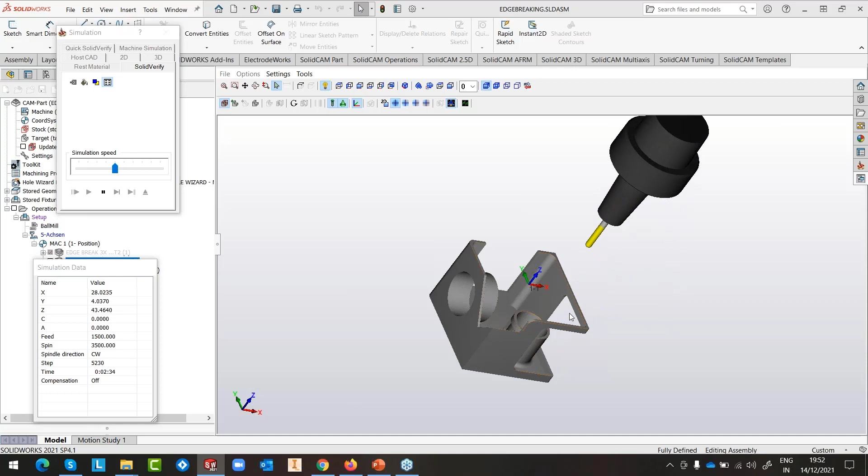You can see it's finding directions from where it can enter this part, so that it doesn't leave any of the edges unmachined. So it will try and machine everything that's possible. Linking again is done automatically by SolidCAM. No need for any manual intervention for linking. Since I've given it the limits, it's staying within the limits for machining this particular part.

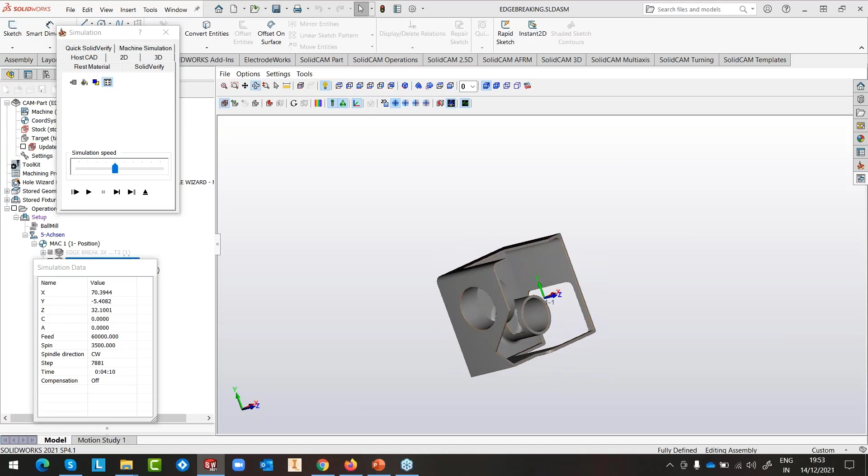That's it. So it's completed this part on every possible side where it could find the edge, and did the deburring of the entire part without any collisions, without any definitions from the user, everything automatically identified and machined. So it's a very interesting operation that was introduced in the 2021 version of SolidCAM. Again, it's available in 3-axis as well as 5-axis options as far as the tool axes are concerned.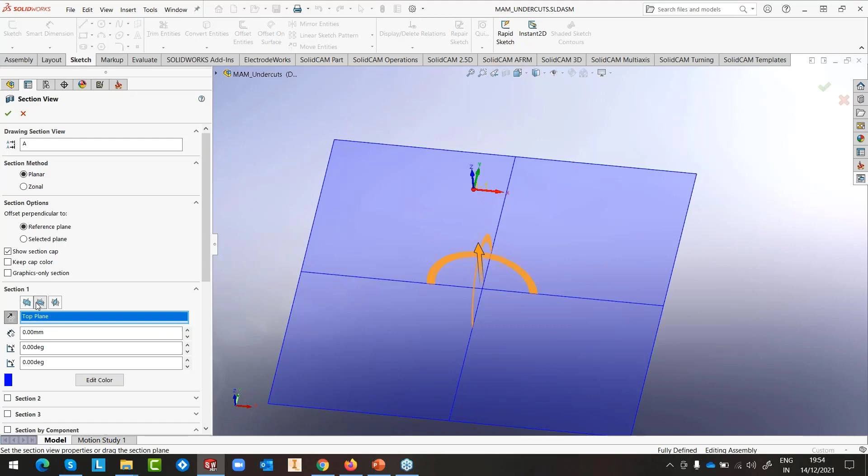Another very interesting thing that we released in 2021 was that we enhanced our multi-axis machining to be able to detect undercuts when it's doing 5-axis machining. Generally, in our multi-axis machining, the toolpaths go parallel to the floor. If I take a section here, you can see that I have an undercut.

So if the tool goes parallel to the floor, it will not be able to machine this area at all. Let's look at the first toolpath, where I asked the software not to machine the undercuts. So I'll calculate this toolpath. You can see that obviously it cannot machine the undercuts. It has left the area unmachined.

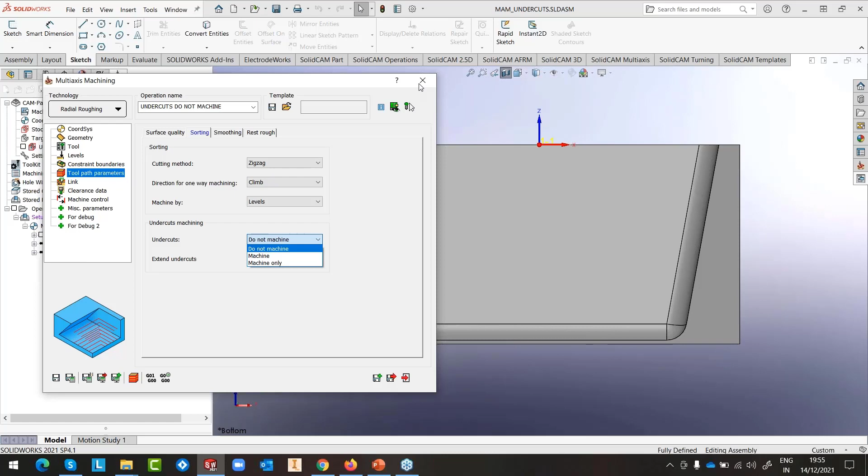In the same toolpath, when I go into my toolpath parameters, in my sorting, I have asked the undercuts not to be machined. So I've got 3 options here. The first one is not to machine the undercuts. The second one is to machine the undercuts. And the third one is to only machine the undercuts. So the second toolpath here that I have is machine only the undercuts.

Now, when you have this option enabled, remember to use only a ball nose tool, because the tilting happens only with a ball nose tool. So let me calculate this toolpath. It will identify only the area that has undercuts and machine the area there. So let's run the simulation.

You can see that here I have also defined the holder. So it's also taking into account the holder. Not only did it tilt because of the undercut, but it also tilted more because of the holder that I've defined here. The last one is machine undercuts along with the toolpath. So you'll get the complete toolpath along with the undercut. You can see that along with the straight toolpath, it's also gone into the undercut.

So if I again run the simulation here, not SolidVerify, sorry. Going to use the host CAD, not SolidVerify. So you can see as it comes closer to the undercut, it starts tilting. Ramp, and as it comes close to the undercut area, it will start tilting. That's it. So again, a very nice feature.

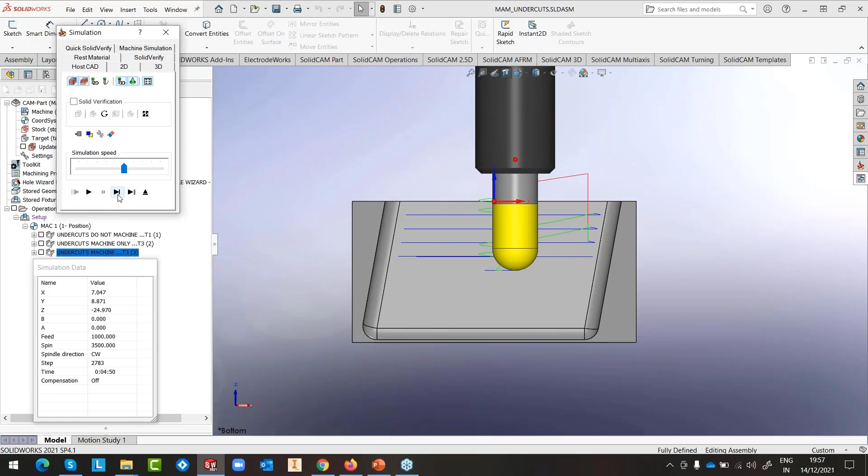Now, where do we apply such a feature? I'm going to show you a real world example of where this particular operation is to be applied. Let's say I have a frame part, and in a frame, you have positive draft on one side and the other side automatically becomes negative. So I have done my roughing.

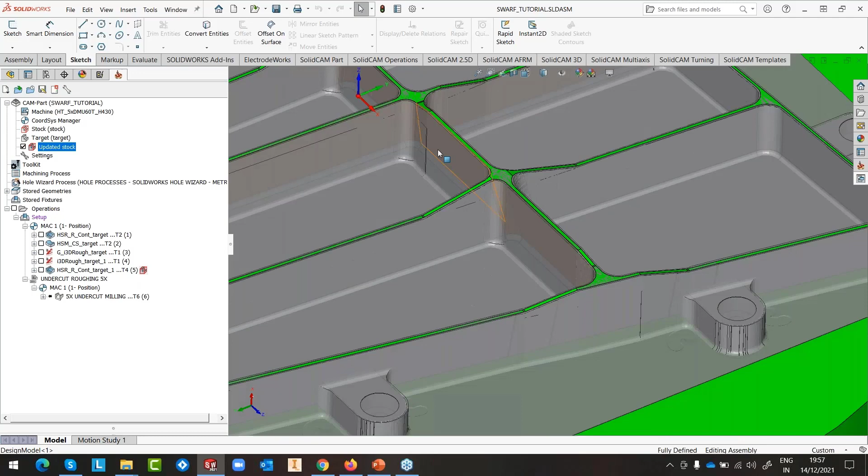If I look at the updated stock, I've done my 3-axis roughing. Obviously, I'm going to have material left here because 3-axis cannot detect this undercut. So now I would like to rough in 5-axis only these areas where material has been left, and I want the software to automatically detect this.

So in my 5-axis multi-axis roughing, I go into the toolpath parameters and say just machine the undercuts and extend the area by 2 millimeters. So I'm going to save this, and let's calculate. Now, since this is a large part, it'll obviously take some time.

Oops. That's because of here, my link. Use the ramp, retract feed distance, use ramp. Oops, what is the problem? That's strange. Did I use, okay. I'm so sorry. Let's look at the floor faces. Okay, so sorry. I need to define all the floor. My bad.

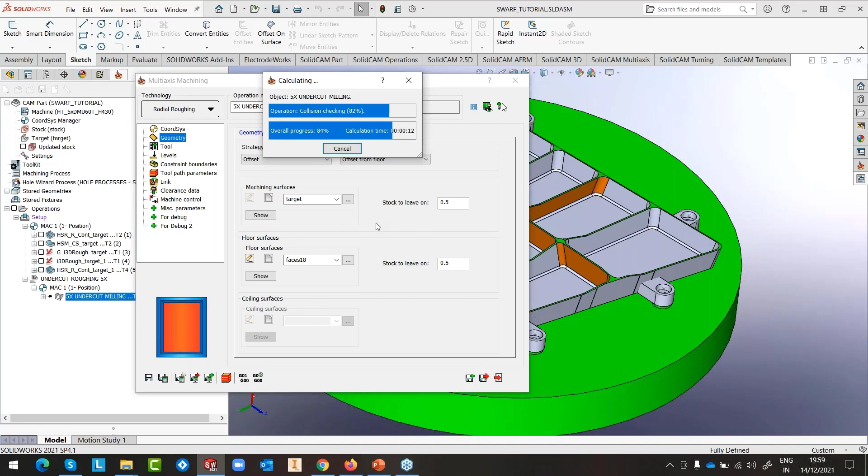So what it is going to do now is it's going to detect all those areas where the previous tool did not enter, or because of the undercut, the previous tool did not enter. And only those areas, it is going to generate the roughing program. You can see what it did very nicely. It just detected areas where the previous tool did not enter, and it will machine only those areas where the previous tool could not enter because of an undercut.

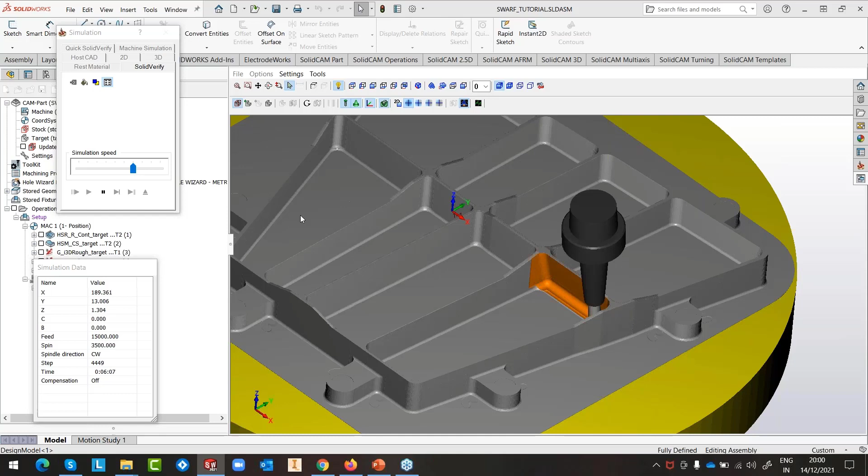So if I run the simulation, let's go to SolidVerify. Okay, let's run only on one side here. And you can see it's doing nice 5-axis roughing. Automatically, it'll take step over based on the material that is remaining, and it will do the machining of it. No. Again, this is full 5-axis.

So very interesting features have been released by SolidCAM in 2021 version, which includes like what we saw, edge breaking. We saw this automatic detection of undercuts and machining or roughing of undercuts using automatic detection. Apart from this, we have also released another very important feature in SolidCAM's 5-axis kitty. I think after this, I'm just going to show you the new simulator, and then we'll wrap up.

So I'm going to use what we call as the edge trimming. Now, what happens with edge trimming? Why is this released? Several of our customers manufacture parts for aerospace using composite materials. And several of our customers are also into the automotive domain, and they manufacture parts using vacuum forming process. In both these processes, you need to trim the part to the final shape. And sometimes the parts are not simple, they are pretty complex, and you need to use either 4-axis or 5-axis machines to complete this trimming.

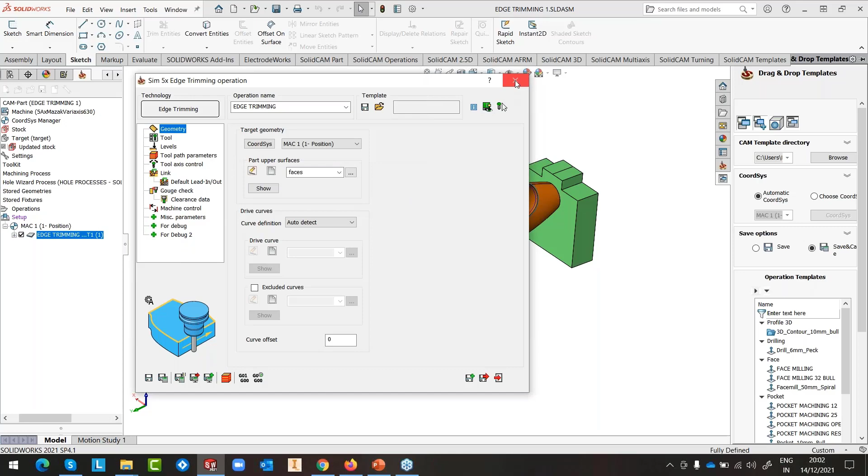So once this edge is known, the user then needs to create the toolpath, and the toolpath has to be created in such a way that it actually trims the part. In edge trimming, this is automatically done by SolidCAM. It identifies the edges, and once the edge is identified, it then creates the trimming toolpath in 3-axis, in 4-axis, as well as in 5-axis. So you have got all the options out here, 3, 4+1, that is auto tilt, and 5. So we're using 5 here, and you can see that the edge detection is automatic. Calculate this toolpath. Done. It's pretty quick, so it doesn't take much time.

And we show you the simulation. So this is how it will trim both the pockets and this particular area here. So it will trim off the excess material and it will generate the final shape. Very important for people who are doing composite materials, and also for people who are into vacuum forming.

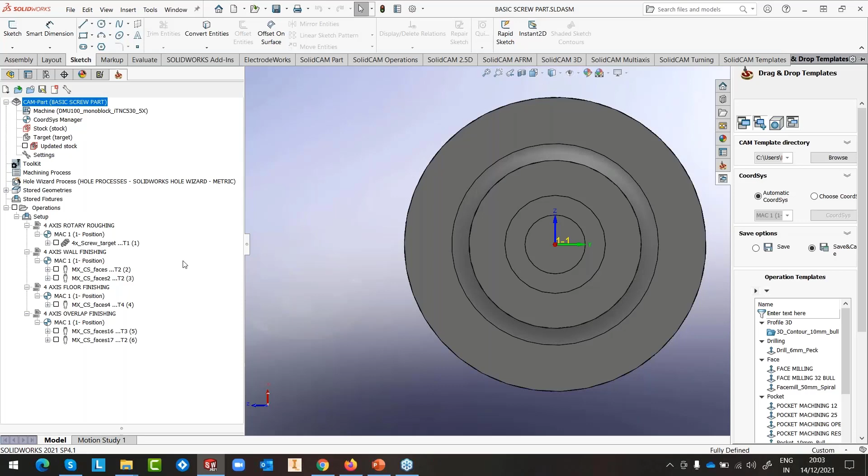Right, let's quickly go to our new simulator, and let's open again the part that I just generated for my rotary, and I'll right click on the operation here, and I'll go into the new SolidCAM simulator. You can see the new SolidCAM simulator is a floating window. I can make it as a floating window, or I could just merge it with the SolidWorks window that I have. Or I could just drag it and put it into another monitor and continue looking at the simulator while I keep working on my part.

Very, very important. Okay, so you've got several options here where I can see the toolpath while the machining is happening, or I could switch off the toolpath, or I can follow the tool, or I need not follow the tool. I can show the material removal or just a plain simulation. I can also record the simulation. Now this will slow down your system slightly, but I can select this record simulation. And by doing that, it will allow you to go back and forth.

When you go back, it will add material. When you go ahead, it will remove material. So you can always go back and forth to see if you have missed anything, because you were working on another window and you just missed seeing certain things. So you can go back, it will add material, and then it will start generating the simulation again. But again, like I said, it's going to be a bit slow when it comes to recording and then playing it.

So what you're seeing here is a toolpath as well as the cutting simulation of the part. So I can switch off the toolpath. So I'll just see only the cutting simulation in this case.

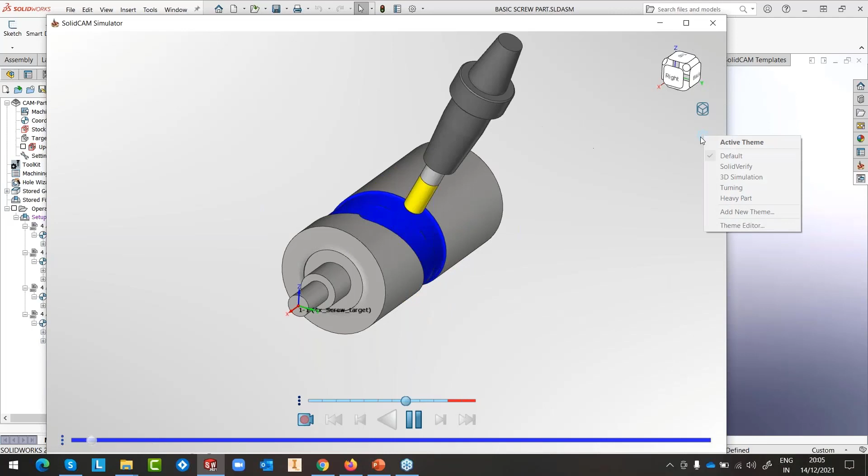For people who would like to have different themes, I can stop it and I can change the theme. I can go into what we call the SolidVerify kind of theme, where I can even do a comparison between the actual part and the machine stock. Okay, so I can stop here and I can run the comparison.

So it shows me, using colors, the amount of material left. So here it says that it's more than 1 millimeter anyway. So I can drag this and I get a completely different set of colors. So in the comparison state itself, I can start running the simulation. So you can do comparison, or you can switch off the comparison and only run the simulation here.

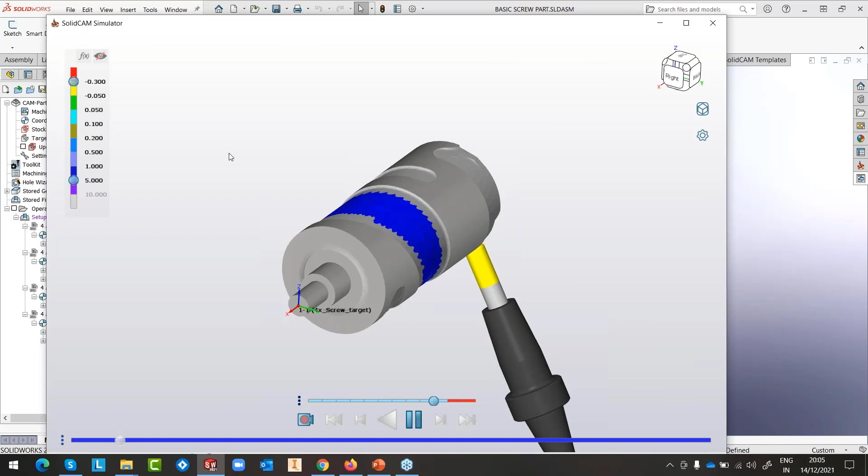There is a complete webinar done by Anthony Calderon on the new simulator. It's available on our website. It's also there on YouTube. You can go and have a look at it to see the complete features of our new simulator.

This particular webinar was more intended to just give you a glimpse of all the new things that we have with SolidCAM 2021. And we urge you to go on to the new version to take advantage of the new features that we released with 2021, especially features like edge breaking, geodesic, the new tool table, the new simulator, enhancements in 3D HSR and HSM.

Also in finishing, we saw geodesic 2.5D like the roll-in approach, thread milling where we did multi-start. We have multi-start thread capabilities now. All these features we would like you to take advantage of by moving to the latest version.